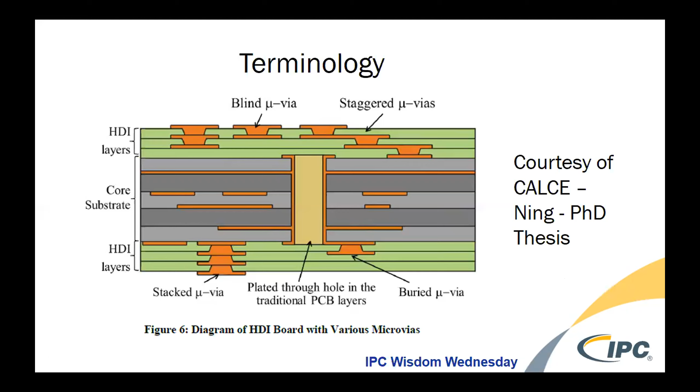Continuing on, we don't think this problem is your routine microvia that we've been making for over 20 years. My own memory of this is that getting going way back in the McDermott days with photolithographic microvias, we thought we had it under control, but our customer came to us and said, you can't just test 10 of these, you got to daisy chain this up into the thousands to be able to test for it. But now we do that routinely, and those are not in general any kind of a problem.

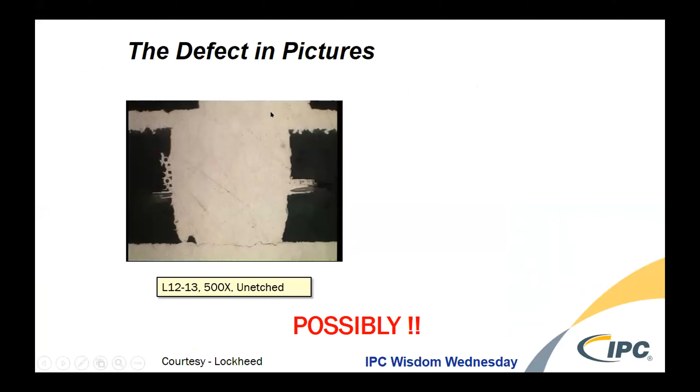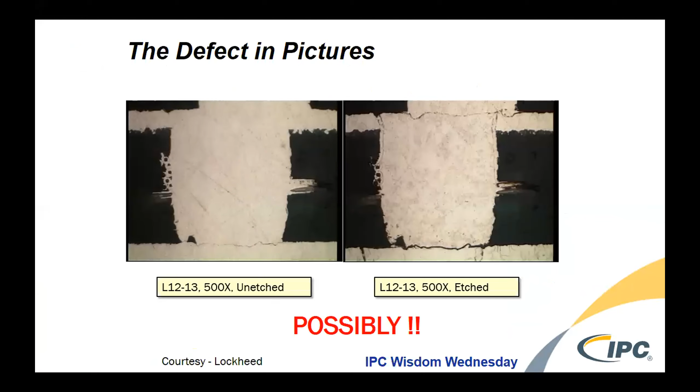In this picture, this is an unetched section from Lockheed. You can't really see much of an interface here. It's unetched. Possibly after the micro etch on a cross section, you can see a weak interface. There's a little differential between the 2 interfaces that are shown in the right picture, but we really are going to get into the test methods of determining electrically what the occurrence of this defect is.

Of course, that's $1 million or $2 million a unit, and it's not at all common in printed circuit board fabrication. Much more common in integrated circuit fabrication, but it's not something that we can rely on because it's just not distributed in the printed circuit industry to use as a control tool.

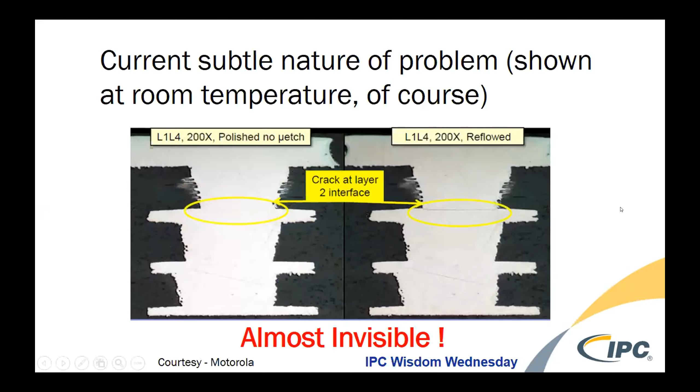They have determined that in the simulated assembly cycling that this interface in the right picture goes open at 224 degrees centigrade, but it doesn't stay broken. It comes back to electrical continuity as the board cools to 184 centigrade. The total here was about 70 seconds of being open, but after that, anything that you did electrically would say that this is a good microvia stack.

So this one is one of these interesting problems as an intermittent that when it's broken, it doesn't stay broken, and intermittents are just a horrible problem for us in printed circuit manufacture and assembly.

Here's the graphic of the technology that Motorola uses, where they record the temperature in 6 simulated assembly cycles of lead-free. You can see in the left graphic that the weak microvia stack opened up on the 3rd reflow and remained open on every further reflow. Again, this was their design using stacked microvias.

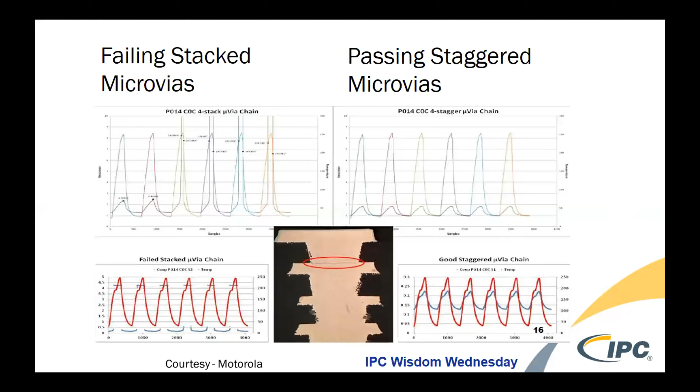When they staggered the microvias and offset them from each other, the board was more compliant and did not show any open microvias with the same layer count, microvia layer numbers, et cetera.

The confounding issues here then are that this problem occurs sporadically. In general, our input so far says you can only find it at high temperature with continuous resistance measurement of your microvia stacks. It can self-heal as the temperature drops.

It's possible that as this self-heals and you have electrical continuity, that the epoxy glass may relax or change over storage. Motorola reports that over months of storage, they've seen things open up again. And the nightmare for everybody in our electronics industry is you get intermittent failures later, most likely after this has been deployed in the field.

In going back through the history of the problem, we think that this might date to 2006, but with our information from Motorola, this is again Motorola Solutions in Illinois, they noted in 2010 that they had some kind of an issue, and by 2012 they felt that they had diagnosed this as something that they have brought to us for our inputs and been quite open with their data and their technology.

It's been misdiagnosed. I think based on the number of people that are on this call, many of you think that it's an issue that you only have. But one of the reasons IPC is involved is that this is not a uniquely local issue, and it's a common denominator of something going on in our industry that we want to publicize, collect data, and solve this problem.

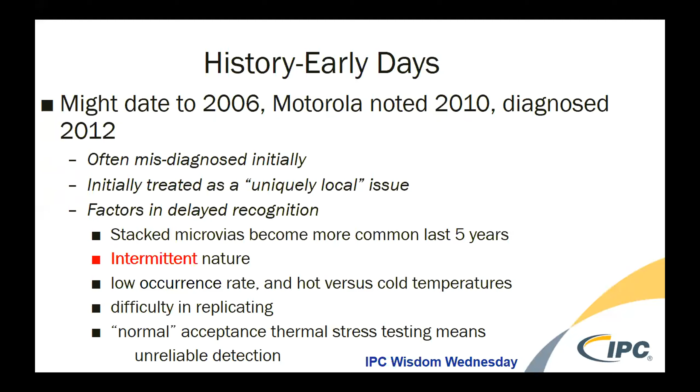And the traditional acceptance tests of optical inspection or anything that's done at room temperature are unreliable in determining what this is. Directly at IPC, this came to the TAEC group in 2017. It took some months for us to gather enough people that were willing to say they had the problem and contribute to it. The IPC Solutions Exploratory Group started in 2018 and published a white paper last year that I've talked about.

Proceeding on then, the current understanding of the problem, and I hope that this gets across to you with either your own experience or stimulates you to being able to contribute to this. I can't emphasize enough that it's open at high temperatures and you can find it, but it indicates there's a weak microvia interface there, and that could fail in the future. So you don't want this in your product.

All right, our current activities. Right now, all we can say that people are doing and that have shared data with us is they are in the containment mode. They are screening for it. They're trying to prevent any of these weak microvia boards going out to the field.

To do that, they are rejecting some of the product that comes in, and each company has some kind of a screening test, but at this point in time, they're taking a yield loss, and while you'll see Motorola's statistics on this, this yield loss and high cost to use this desirable stacked microvia design is causing problems, and we don't want to keep this going and have to inspect quality in.

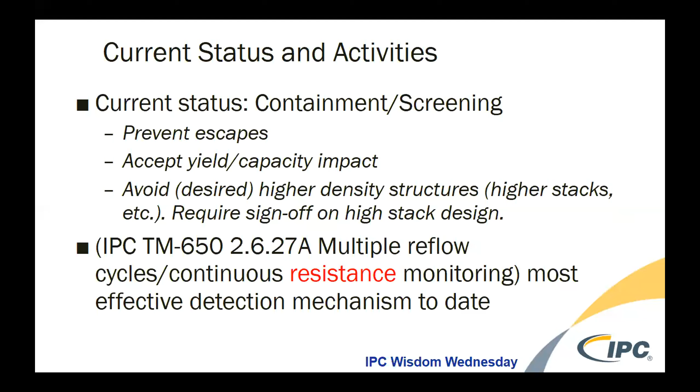The white paper, WP023 from the Weak Microvias Committee, does outline that there is a weak microvia interface somewhere between the target pads and the electrolytic copper. There's the potential here of electroless copper being involved. We're looking for more data on direct metallization and what the effect of that is, and we would solicit inputs from any of those. Again, I can't emphasize enough that if you electrically test at ambient temperature, most likely you are not going to find this problem.

Continuing on with the white paper executive summary, our effort really is to try to sort this out and limit the number of experimental designs that have to be done. And really we're into an effort to try to use data in the 2019 mode and sort that rather than have to run thousands of printed circuit boards with different variables and different locations, et cetera. So anyway, we want to understand the deficiencies, establish appropriate test and inspection protocols, and make sure the resources are in the field to analyze the product.

To sort out the variables, we at the committee are using a technique called a fishbone diagram. Before we get to the factors, most people think, well, making microvias is a pretty simple process. You just have two layers of conductivity.

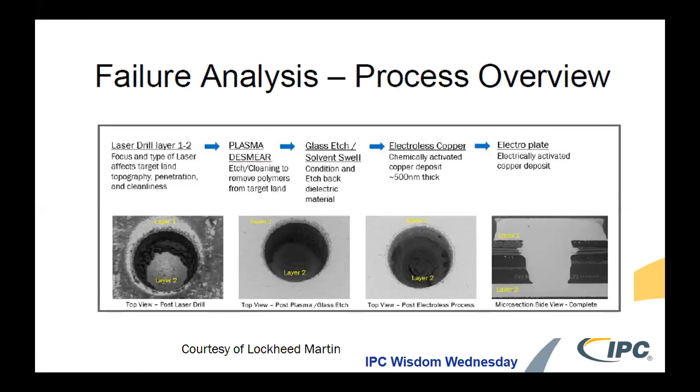So we do have one interesting committee member that is mechanically microvia drilling at this time, so it will make an interesting comparison between the generally accepted process that I show you here and the process that they use. The fishbone that we've come up with looks like this. It's kind of the 7M approach.

The machines that are used, the methodology that's being used, materials that are involved, any inputs that come in from your instruction or supervision, the measuring tools that you're using to determine the problem, and are you maintaining your operation such that at the start of the time, everything was okay, but you're letting your process drift.

And then I guess Mother Nature would be the stuff happens thing where we can't really determine that there's a cause and effect, but anything that we can't put in these would go into the Mother Nature category.

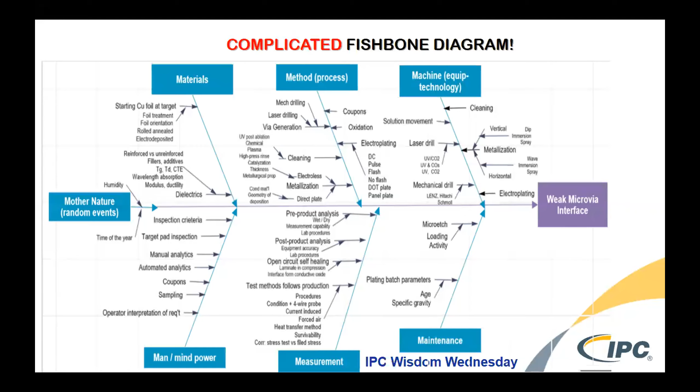Based on these many inputs, we're trying to do a data mining exercise, and we solicit your help in going through this. Our hope is that we don't have to start at ground zero with this round robin testing. There's a limited amount of that going on, and it may evolve to that. Mike Carano has told us that he would take to the IPC board a request for funding for round robin testing if that's what it gets to.

To gather data in January before the IPC Expo, we drew up an extensive checklist from the fishbone diagram. And don't be scared off by this, because we do get a number of these back, but there's a couple of things that we want to really emphasize with you before you submit data. The first one is that IPC will randomize this data.

I don't know what Chris Jorgensen down here will do with it, but he's our clearinghouse as the staff liaison to give your data a letter, a number, or something like that, so that it's blind to the rest of the Microvia team as to the data that you're submitting.

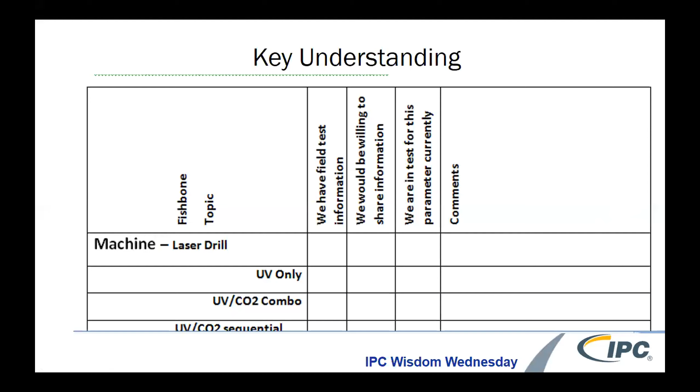So far, we've not done a formal failure mode effect analysis, but focused on the weak microvia interface. And the problem is that it's allowed to escape out to the field. This is just an example of a numerical scoring that Happy did in his past data mining efforts. So rest assured that we've got an industry expert in data mining along on our committee.

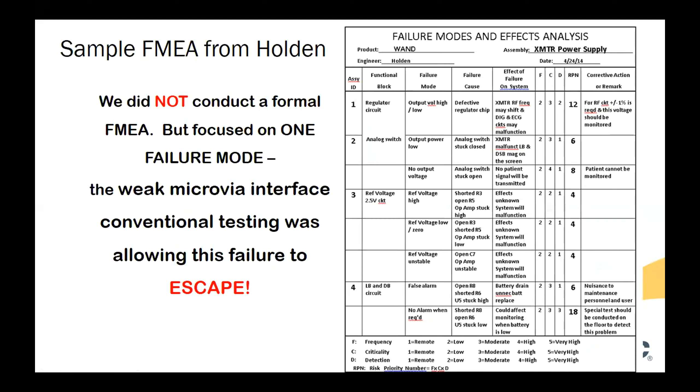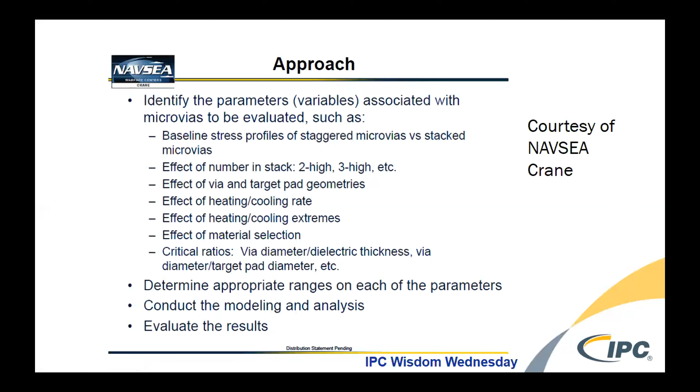Reliability activities that are going on, I can only enumerate a couple of examples, but a number of other people. I've got 2 examples here, and I know of at least 2 more activities that are going on in terms of trying to model things. NAVSEA Crane, the executive agent for printed circuit boards, is working with these parameters and has internally funded a data modeling approach to try to determine some of these parameters and so forth, and contribute that to the efforts of the weak microvias team.

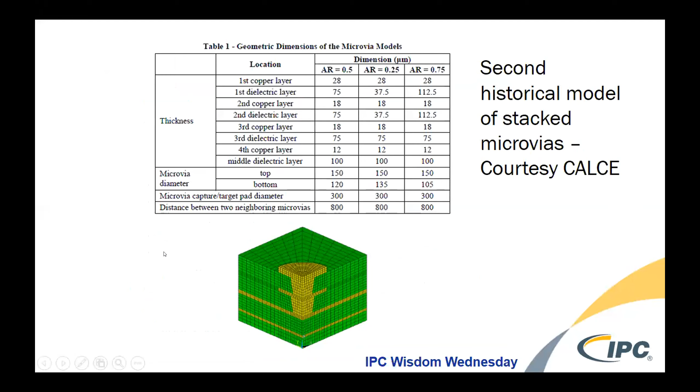Another example is this one from CALCE. This comes from a PhD thesis. Again, they are simulating up to 4 levels of microvias, different aspect ratios of the microvias, and what the stress levels could be. Pardon me. So we know that they are one of the people that has published some data modeling result.

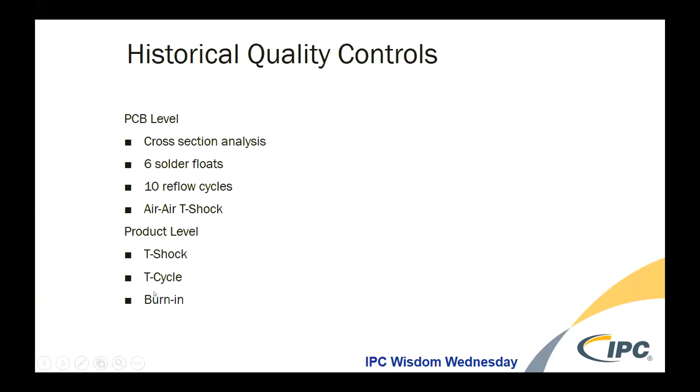Currently, Motorola Solutions has volunteered this mitigation plan, and as I go through it, you'll see what their success is in containing the issue, but they are very active in trying to understand it and try to prevent it with the things that will become obvious in what they use. Okay, the historical quality control methodologies for circuit boards, both at the circuit board level itself and at the product level where the entire assembly is tested.

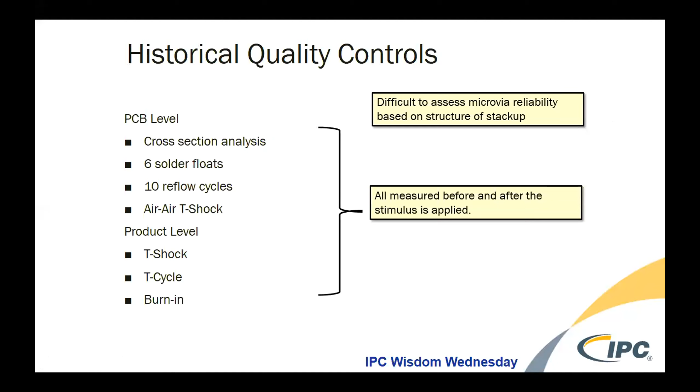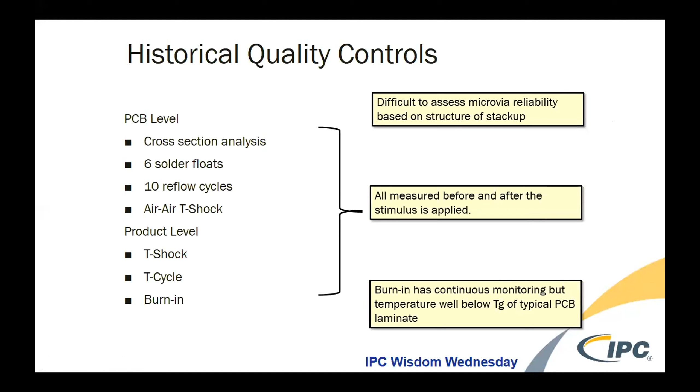Microvia reliability, of course, is hard to analyze based on the structure. And then these are measured before and after the stimulus, but not necessarily continuously monitored as the stimulus is being applied. And then finally, burn-in has monitoring, but its temperature is not nearly as high as the simulated reflow temperatures that we're seeing that indicate the presence of a weak interface.

Motorola has enumerated these, and I had shown you previously that they use 6 cycles. They use a 4-wire resistance measurement with theirs. They do use features that are common to that circuit board itself, so we're not testing something that's out of the ordinary. They reject any panel that shows an open or an interconnect issue on any one of the boards on that panel. They've chosen to use the test methodology that I enumerated, but it's possible that others out there have other IPC accepted test methodologies that could be used. You just have to demonstrate those and work between the board fabricator and the board assembler.

Motorola's own experience in yield has gone up over the last 4 years. They're up to 94% now, but they do still reject some product. And likewise, their analysis says that, at least historically, they have more problems with 4-layer stacks than the 3, and the 3 more problems than 2, et cetera. However, with their test protocol, they feel they've had 0 product failures since they put this into practice.

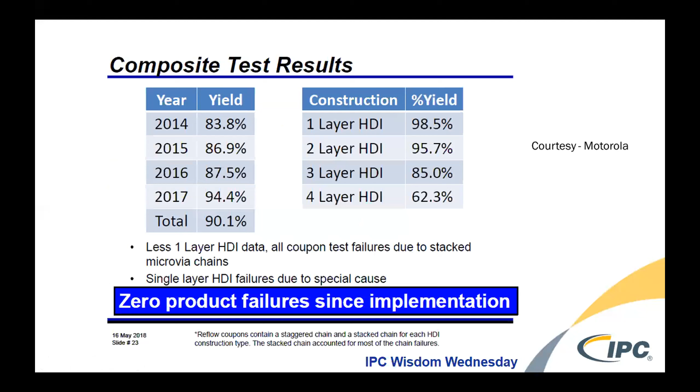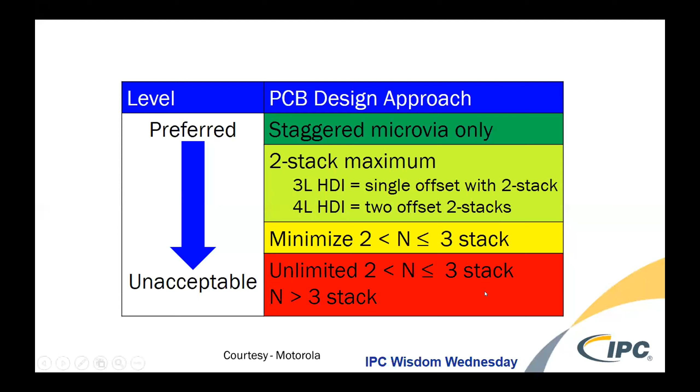I think I hit the backward. There we go. This is Motorola's design approach. If you can make it with staggered microvias, make it that way. If you've got a 2-level stack, that's okay, but if you have to go to 3, you have to offset at least 1 level. And if you need 4 levels, you have to offset twice. Trying to minimize any stacks that are greater than 2. And again, as I said, if you've got to be above 3, you have to have a program manager sign off for that design and be willing to understand that he's taking a chance with weak microvias.

In determining how to tackle the problem, we've divided things up pretty much based on the Fishbone, and we have 7 sub-teams. The first one relates to design, simulation, and modeling. This may be a little bit out of date, but they're working on their scope, and Joe Barber from Raytheon's a team leader. The characterization and test methods, I'm sorry, on laminate materials, this is determine the stress from laminate. Doug Jeffery of Electrotech is the team leader. The construction and design elements, Steve Murray of Northrop, and Happy Holden, who is retired but very active in our group, are co-leaders on that.

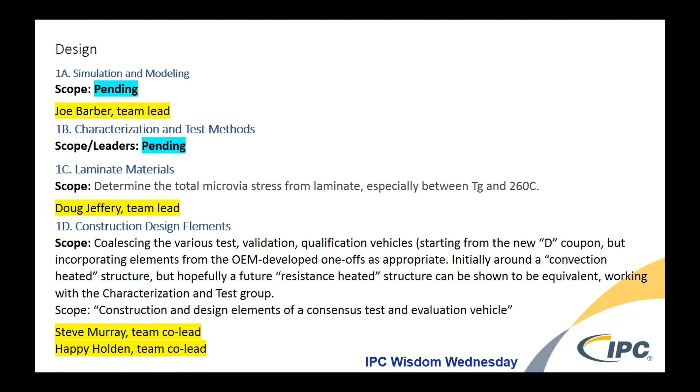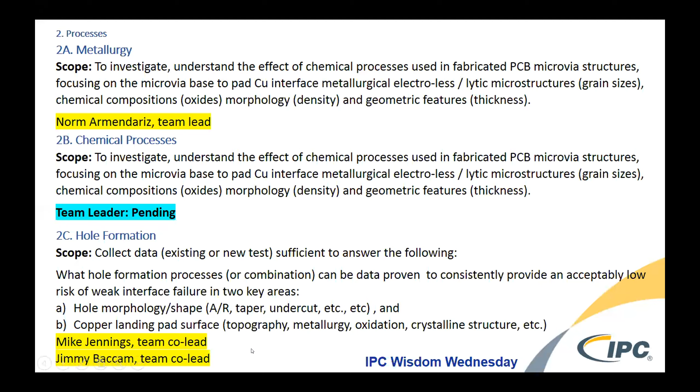The metallurgy and the chemical processes teams so far have been meeting together because the chemical processes create the metallurgy. I don't know whether these teams will merge or not. Norm Armendariz from Raytheon is leading that group. Hole formation, this again is how do you get either laser, or we have one example of mechanically drilled microvias. Mike Jennings is with ESI, and Jimmy Baccam is with Lockheed. They are co-chairing that working group. And data collection, I think you would gather from my comments that Happy Holden is the fellow that's in charge of all of this.

So in summary, we as a committee have told the world that stacked microvias can fracture at the interfaces. The worst would be if this opens up in the service life out in the field. I think you understand that it's unpredictable and you have to test for it. Current industry methods have not been terribly effective.

We continue to work. One of these is the 27A, but we are looking for inputs from other cycle manufacturers, equipment people, et cetera, on some of the 2.6.26 test methods and how they have been used to reliably detect this problem.

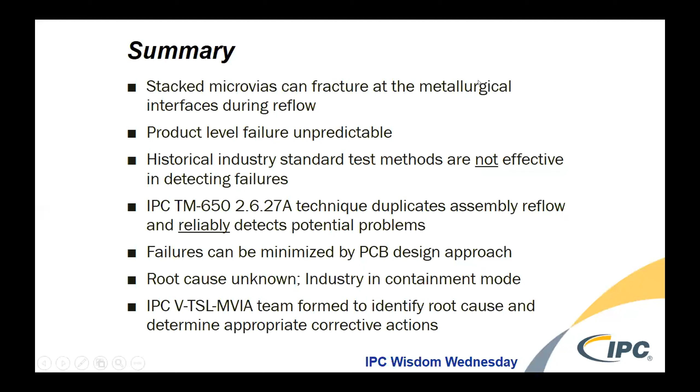Design can be used to the extent that you run out of space and you have to use stacked microvias. There may be more than one root cause, and we're certainly in containment mode, and we're working to try to identify all the issues and solve this, hopefully by using mostly data rather than enormous round robin testing.

Where can you help us? Again, this is the Microvia Reliability Summit in Baltimore. We, as a Microvias working group, have a session on Monday afternoon from 1 to 5. It may break into the sub-teams. This agenda is not completely set, but we've reserved the room, and we have conference call capabilities so that people who want to dial in can listen in.

And then I have a little plug here for the IPC SummerCom. This is the standards meeting that's been moved from co-locating with the SMTAI meeting in October to June in Raleigh, North Carolina. We will be having Weak Microvias committee meetings at this event.

Finally, please help the Weak Microvias team. The long-term goal is high reliability and robust printed circuit board structures. Again, contribute data that you have through Chris Jorgensen and join one of the working teams.